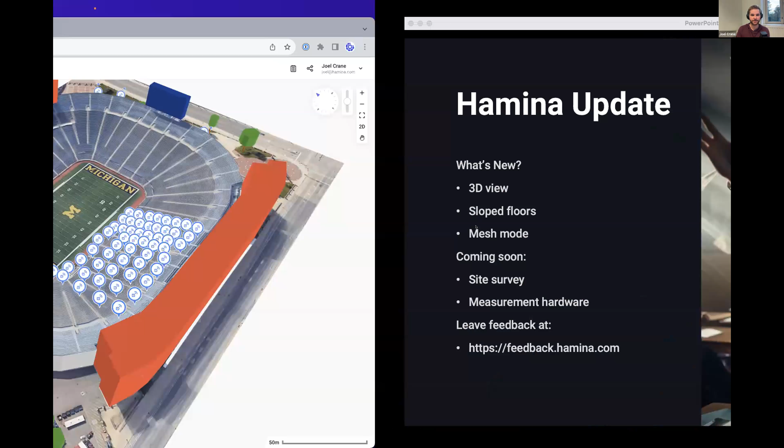Real quick on what's new in Hamina—we've implemented a 3D view. So you can look at everything in 3D, making that jump from 2D to 3D isn't as big of a deal as you'd think from a programmatic perspective. I should be careful not to say that around the developers—they'd say, what do you mean that's not a big deal, it was huge to build that in there. But when we have a floor plan and know the heights of the walls and APs, we have all the data we need to show how tall everything is. The big thing I like to use the 3D view for is validating that all my geometry is correct, making sure warehouse racks are the right heights and all that stuff.

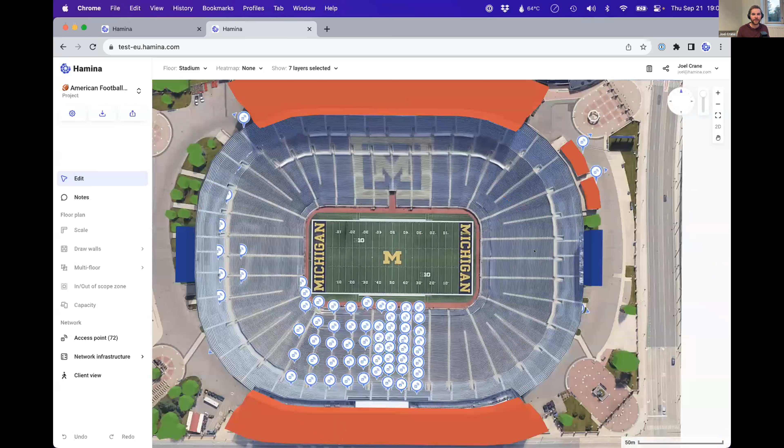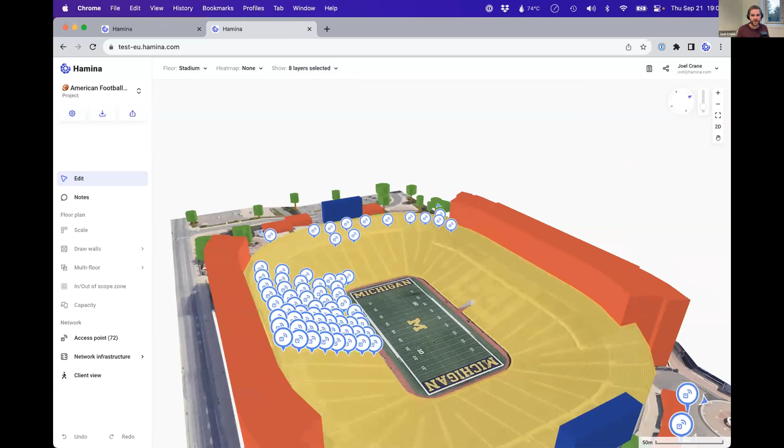In addition to the 3D view, we also implemented sloped and raised floors. The way I drew this particular map, it's a 2D image, just a snapshot from Google Maps. Then I went through and drew in raised floors—these orange areas are where the floor is raised—and also sloped floors. You define a lower edge and an upper edge, and we can draw a slope on that. You can even draw in crowds on top of that, and the final result is a full 3D model. Even more recently we did attenuating objects and walls with a lower height and upper height, which is how I get the Minecraft trees here. It all propagates in 3D properly—everything works like it should, pretty great.

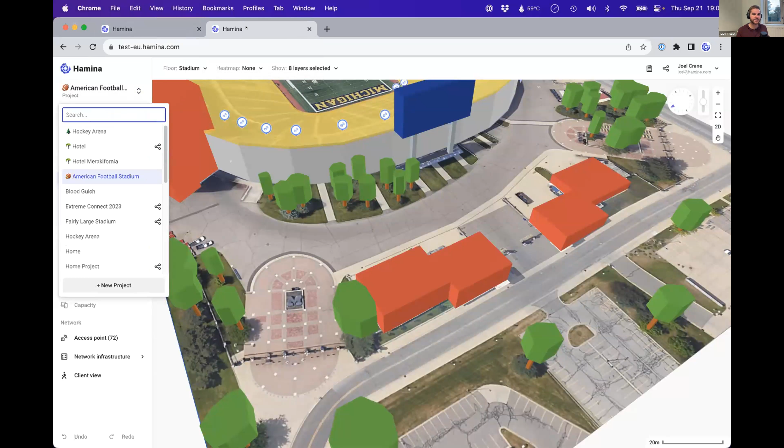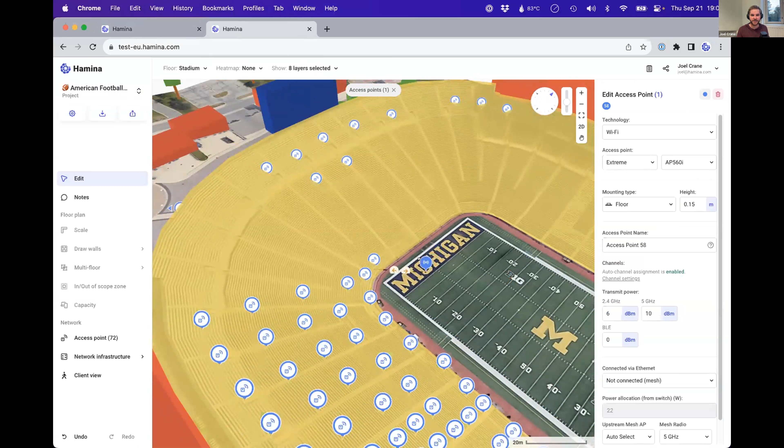Last thing I'll show really quickly before we move on—just for the sake of time, I'll tell you it's there. There's also the ability to do mesh links now. You can go pick an AP, we'll grab this one right here, and if you disconnect it from the Ethernet backhaul, it'll establish a mesh connection. I'm going to do a ridiculous scenario here, you would never, ever do this, but you can see I've got two APs—this one is our upstream AP and our downstream AP. We're looking at negative 76 dBm, and we're expecting 432 megabits per second on the PHY side of things.

So you can use that to look at what backhaul is going to look like and all that. So, okay, that's probably enough for a quick product update.

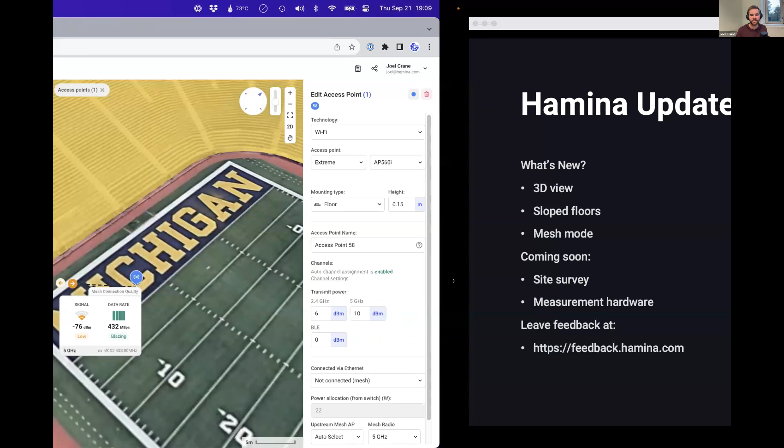And so with that, I think we'll turn it over to Mitch to talk about 1 AP per classroom. So Mitch, what do you got for us? Is 1 AP per classroom legit or is it not legit?

Let me start off by saying that this used to be an argument a lot, a handful of years ago. I can remember being on Twitter having discussions with people about it. I'll just assume it's probably more common these days just because of the amount of devices that are in classrooms.

Now with that, I have to say, with just a little bit of backstory, the school district that I work for is a little bit different.

Thanks, Joel, appreciate it. But yeah, like we have, so just a little bit of backstory. And if I get a little bit long-winded, please speed me up, Joel, please.

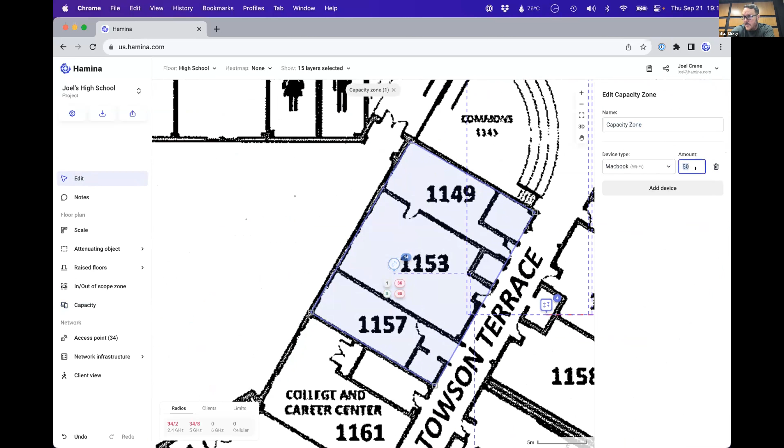We have a very loose guideline that people can see, as far as like this is the AP, this is what it looks like, this is its model number, and this is approximately what you can expect. I'll be honest, I hated slapping a number to that, because obviously it depends. But we do have something to establish a loose expectation, so people know whether maybe they're having a problem, or maybe they've just gone over capacity, and we've got things to remedy that quickly. For us, we loosely state a range of devices that can be expected in a classroom based on whatever access point is in there.

Question for the chat: if anybody has sort of a max client count, everybody's environment is different, everybody's use case is completely different, but it'd be really interesting to hear what kind of client count people try to stay under on their APs. Maybe throw in environment, use case, client count, because those things kind of go together in my mind. It'd be interesting to hear.

So Mitch, have you in Hamina—just to kind of bring it around to Hamina, right—but one thing we do in Hamina, you can actually put this in there, is define the capacity zone. Have you used this, Mitch? It's okay if you say no, it's fairly new. Yeah, that's okay, I can't say honestly that I have yet.

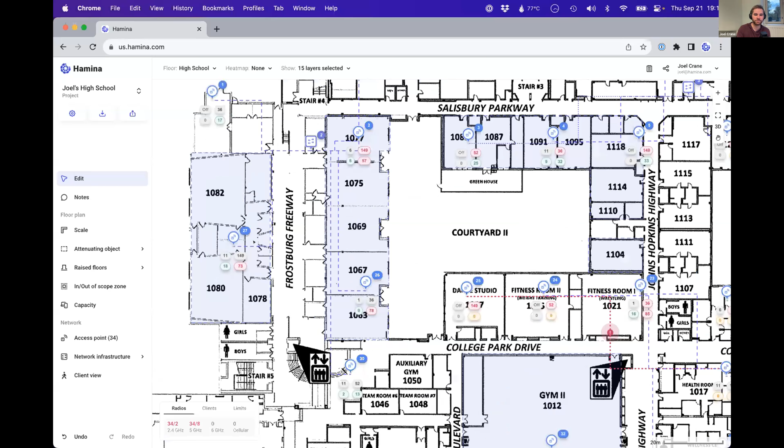Okay cool, so this is the design that I'm going to have you guys grade in a little while, so you get a sneak peek at it here. Basically what you can do in Hamina is draw in a capacity zone, and then say what devices are in there. So here I've got like 60 MacBooks and 50 iPhones. Then we use our roaming algorithm, the same one we use for the client view, to determine which APs we think all the clients are going to associate to. Now obviously we can't factor in how they moved into the room or anything like that, they're kind of teleported into place, but the idea is it's supposed to give you a good idea of how many clients you're going to end up with on a given radio.

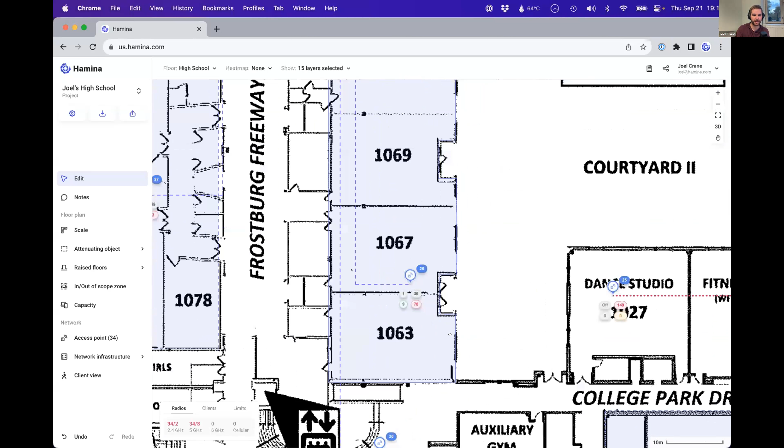Like here you can see this one, we've got 78 clients in the 5 gigahertz band, 9 down there in 2.4. So that's kind of why I'm interested to hear what people try to stick to. Clark Moore says try to keep it at 50 per classroom. Anders says under 35. Gary says 75 to 100, but it's totally based on capacity requirements.

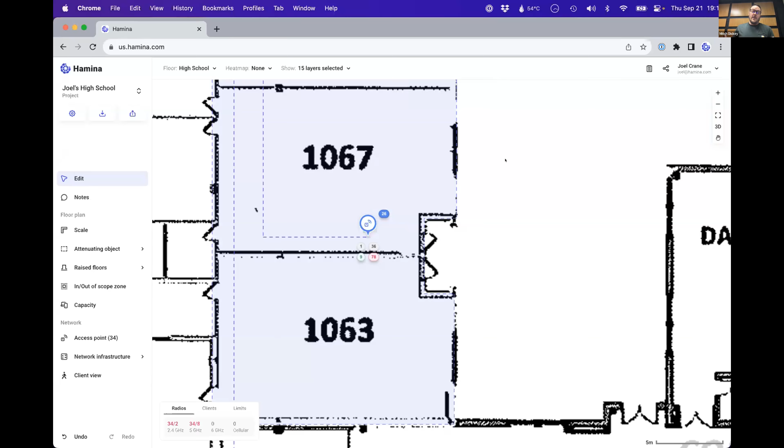Yeah, absolutely. So based on the most common access point that we're using right now, I would say 50 to 75. It's just a common access point on the market right now. 50 to 75 is where I like to try to keep it.

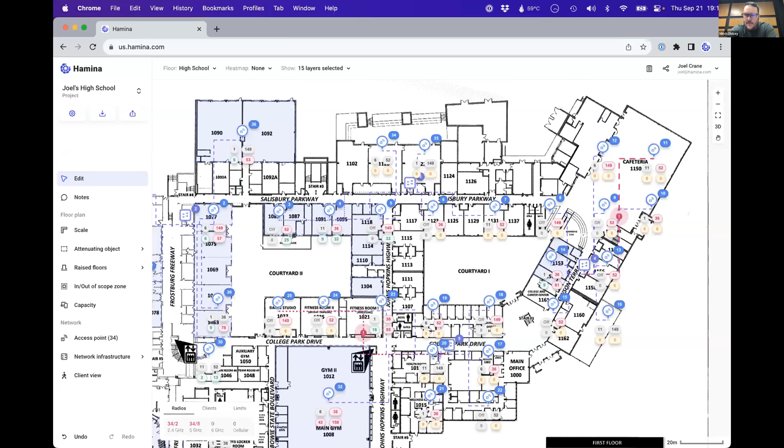So it sounds like it's very similar. And by the way, I just want to say, and I have not used this specific thing, but I know you and I have talked about it offline, this is really a game changer to be able to visualize this type of thing. Obviously can't be 100% perfect, but it's so good to see, especially when you need to explain something to leadership.

Nice, super glad to hear that. I'll be so bold as to put a number on it as well, and I'll prefix this with it depends on the use case of the classroom. It also depends on whether I'm doing dual band, tri-band, single band, 20 meg wide or 40 wide channels. So my standard design for a 20-person classroom, doing 5 gig only, 20 megahertz channels, I'll put about 20 devices per AP. If I'm doing 40 wide channels, I actually did the math, you can fit more clients on a 40 wide channel, so I'll go up to about 33 clients per AP for classroom designs.

And Bryan, just to be sure I'm understanding it clearly, it's because since you have the wider channel width, we can hit faster data rates, get devices on the air and off the air quicker, and thus cram more on the channel. Exactly. So that's why in my classrooms I'm doing 40 where I can, 20 everywhere else.

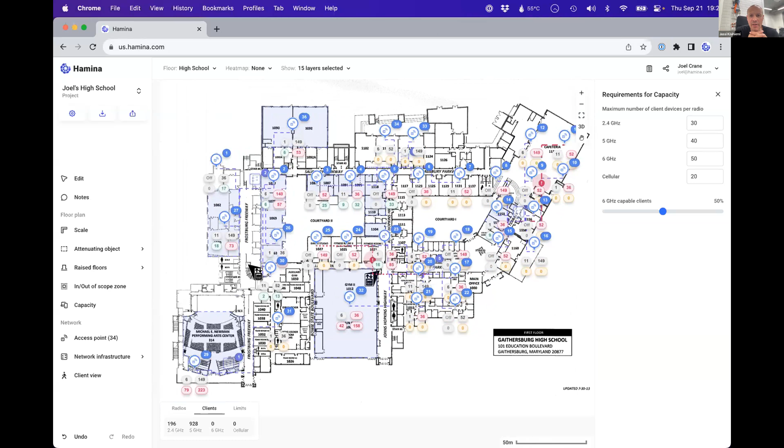Yeah, thank you, Joel Crane. Joel Albert Crane, as his full name is. Yeah, Bryan, I was going to ask, you said 40s where you can and 20s where you cannot. How do you design where you can and where you cannot?

So it's about density. How many 5 gigahertz channels are available in your region? Here in the US, there are 24 20-megahertz wide channels available if you include all the DFS and the 2C band. So if my capacity for a classroom means I need more than, call it 12 APs whose coverage would impact that classroom, then I can't do 40 wides, I have to do 20. Otherwise I get way too much CCI.

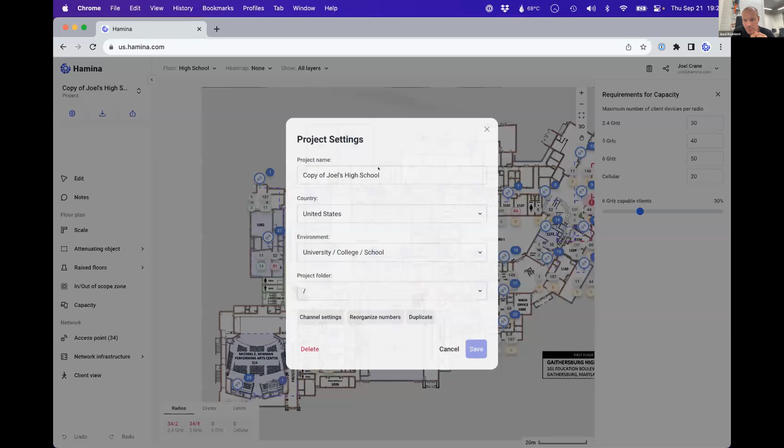So the reason I also ask, sorry Joel for hijacking a little airtime here, is our roadmap. Not to spill the beans, but I'm going to. We've been working on an automatic channel width adjuster, and the first version will be flat throughout the site, an ideal channel width, so if you start to see too much CCI, it drops the channel width, stuff like that. That will be released pretty soon, and I'm putting words in the mouth of our architects, but yeah, that's coming first.

But we also discussed today, like what if you're going to go all Bryan Ward on it and have all dynamic channel widths. That would be version 2, especially since it sounds like people are actually doing it. I should clarify that in the 40 where I can, 20 everywhere else model, that is a site-wide determination.

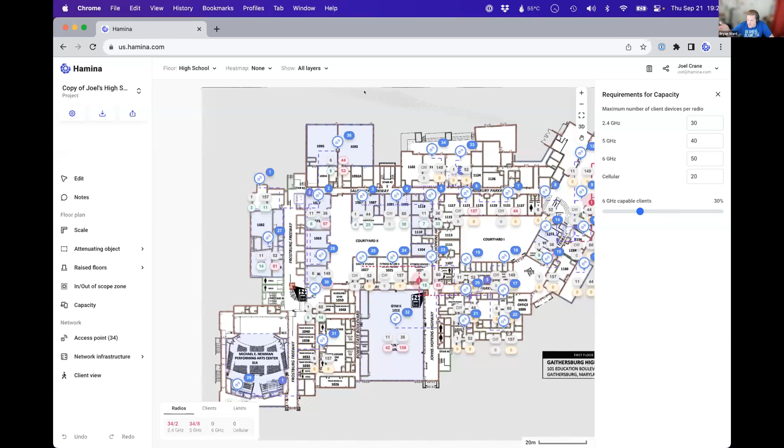Yeah, so it's an entire building, or at the very least, the picture. So there's some talk in the chat that clients are very sticky to their 40 and 80 wide APs, because they use data rate as a basis of association. You cannot mix them actually, or you will run into unpredictable roaming.

That's a very good point. I tried in some of my dorms 20 wide in the student dorm rooms and 40 wide in the lounge at the end of the hall, thinking, hey, if you're in the lounge with 50 people watching Netflix, you get a higher data rate. In reality, the students in the lounge who walked back to their dorm room would be sticky to that AP, even with a horrible RSSI.

Same thing with 4-stream APs and 2-stream APs combined in the same environment, obviously. That's been less of an issue for me, at least that I've seen, but the channel width is definitely high in the roaming algorithms of clients. And the 4 versus 2 stream, 4 streams aren't always available anyway, depends on the environment and how much spatial multiplexing you get. And now with all the Apple devices, they're only doing 2 stream in the client devices.

Nice. And if I could just piggyback a little bit off what I was saying before, I even owned up to it that I hadn't done a ton of research on 6 gigahertz yet, but I did read up on it recently. It seems just based on the physics of 6 gigahertz and AP per classroom, obviously the higher the frequency you go, the more it attenuates, or the quicker it attenuates.

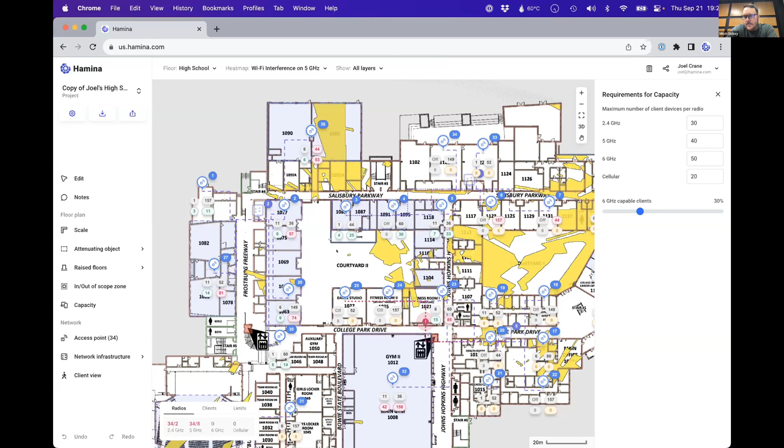Honestly, there really isn't a strategy other than, most classrooms are roughly the same shape, just your classic square cinder block type construction. We'd throw them in the middle. We try to get as close to the center as possible of every classroom, knowing that there's going to be one in every classroom. We try to put them in the center.

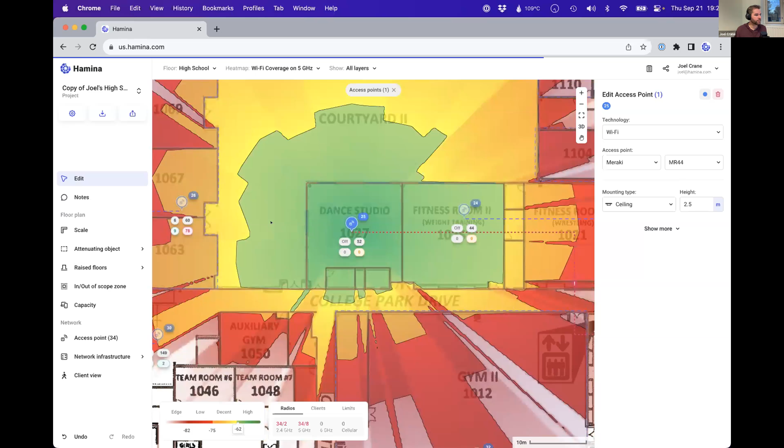Gotcha. Cool. All right. Well, with that, I think we can probably move on to our next topic, which is Bryan Ward.

Hey, Bryan. I don't think you had a chance to introduce yourself earlier. By the way, this is an actual photo of Bryan's last speaking engagement. He got a haircut and shaved since then. But as you can see, the room was packed, so people were really interested in what he had to say. But yeah, Bryan. Oh, go ahead, Jerry. I was just going to say, I'm a little disappointed he didn't dress up as nice for this webinar. I guess we see where his priorities are.

My red clown wig hasn't arrived in the mail yet. I have nightmares about this photo. Thanks, guys, for making this. You're very welcome, and we didn't make it. That was taken, that's a real photo. It was a real photo. Okay.

I joined late, I was having trouble getting on the Zoom. Anyway, I'm Bryan Ward, I work at Dartmouth College here in New Hampshire, United States. Among many other jobs, I'm the Wi-Fi guy. So I was invited to speak here, and what I wanted to talk about was less about Wi-Fi and more about how to even get your design started.

I saw some stuff in the chat when I joined, like, hey, we don't even get floor plans. Well, that's a problem you need to solve. Every project, be it new construction or renovation, there's a set of architectural drawings that has to be stamped and approved by your local town building inspector. That is a hard requirement. So someone somewhere has the CAD files and the drawings, and you just need to find out who that person is, or who to ask to then go and ask the architect for them.

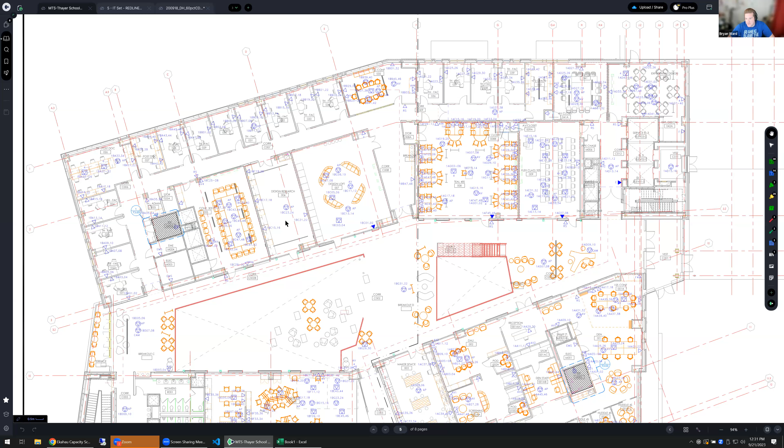Some other types of drawings aren't even drawings. In the CAD file set that has to get approved by the inspector, you can usually get occupancy counts. So in the classroom, we've got 849 square feet of classroom, seats 43 people. Valuable information when you're designing Wi-Fi. They break it up by floor, and they're not doing this to make your life easier, they're doing this because of fire code. They're required to provide to the fire marshal or local inspector how many people are in the building and how quickly they can get out in an emergency. This information exists for other reasons, you just need to ask for it.

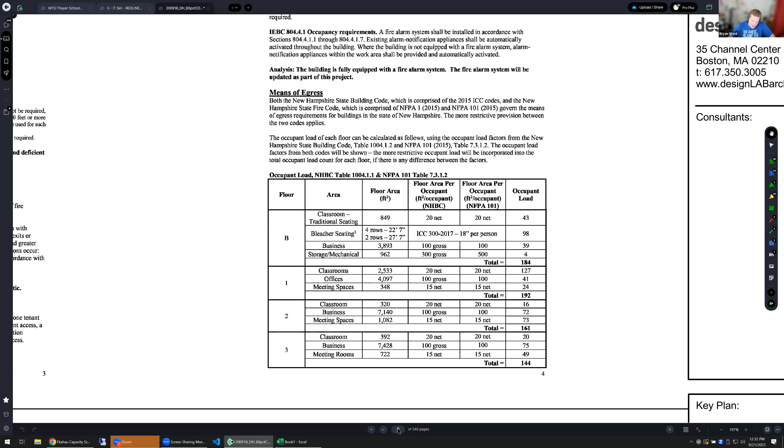Going to another page, another example of a reflected ceiling plan. Again, you can see not only the floor plan and architectural layout, but the drop ceiling, or in cases where you've got a fancy ceiling finish like here, you can see what areas are there. I've done a number of buildings where I show up to hang an AP expecting a drop ceiling, and no, it's this fancy woodwork I'm not allowed to touch. Knowing that in advance means you can adjust your design before you show up.

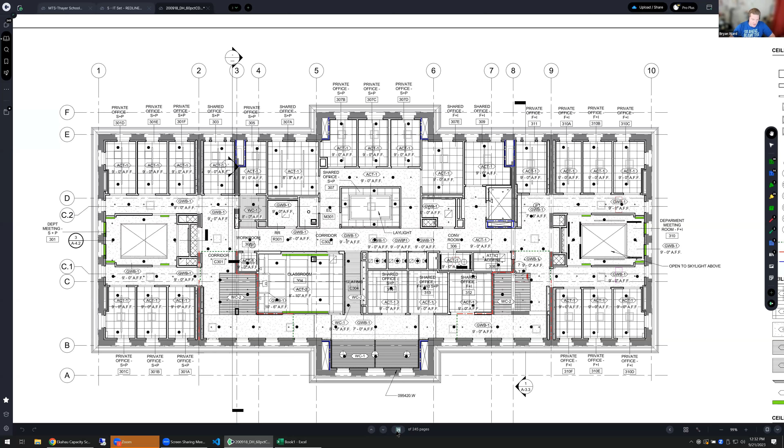If I go to this page, the architects also have to define how the walls are constructed. A huge part of designing Wi-Fi is knowing what your wall materials are. While you can go out and survey an existing building with your survey tools, if this is new construction you don't have that ability. Work with the architect, they have details of what the walls will be made out of. So here we've got 2 layers of 5/8 drywall, 6 inches of insulation, staggered metal framing, and then more insulation and drywall.

There will be floor plans that show, all right, this wall is type 1, this is type 2, and you just cross-reference the other sheets in the drawing package, and you could come up with a very precise wall pattern for attenuation in the Hamina tool.

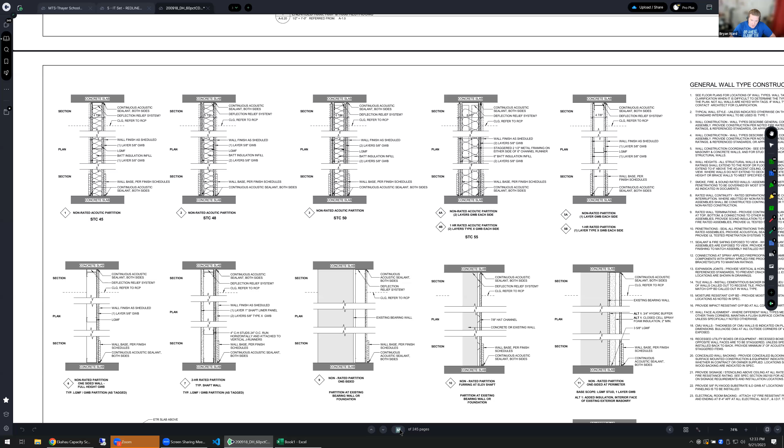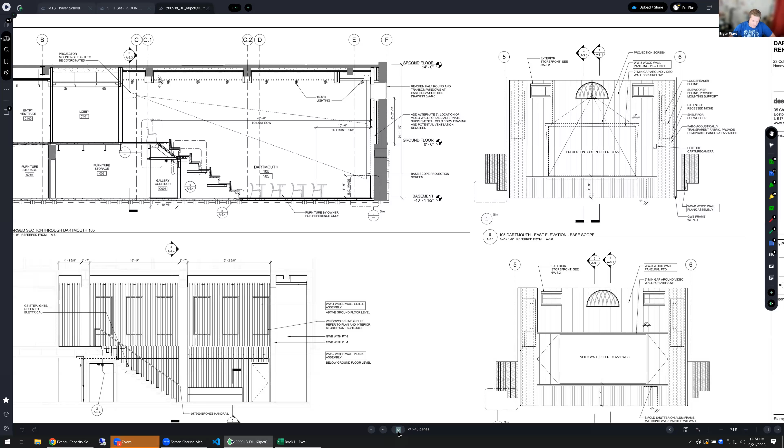One of my favorite problems is HVAC ductwork. Like the drop ceiling guys, the HVAC installers don't just show up and mount sheet metal, although that sometimes feels like it. Architects draw this as well, so you can see, oh look, there's going to be ductwork here - I'm not going to put an access point there.

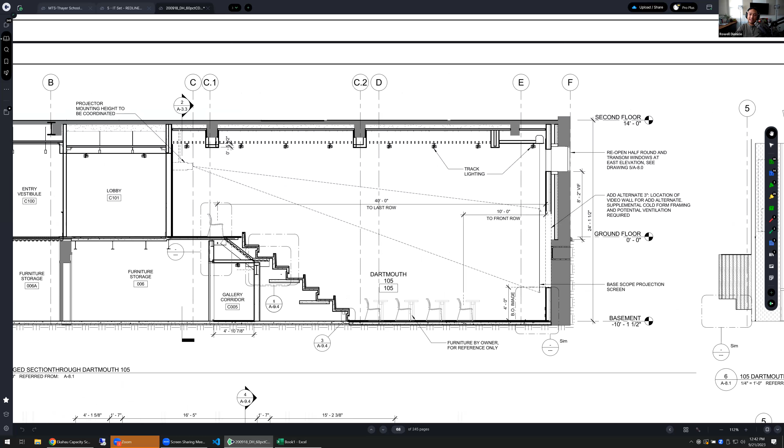Yeah, I'm showing drawings here from construction in progress. You probably won't have these for an existing building. You can ask, they might exist, but probably not. They exist, but somebody doesn't know where to get it. They don't know who to ask, and then they'll just say, 'Can you just use what you have?' And it's definitely not been kept up to date.

I think worst case, go into the hallway near the elevator and find the fire emergency map, here's how to get out of the building, and take a picture of that with your phone and scale it up to the correct size. At least that's going to be representative of what the building is.

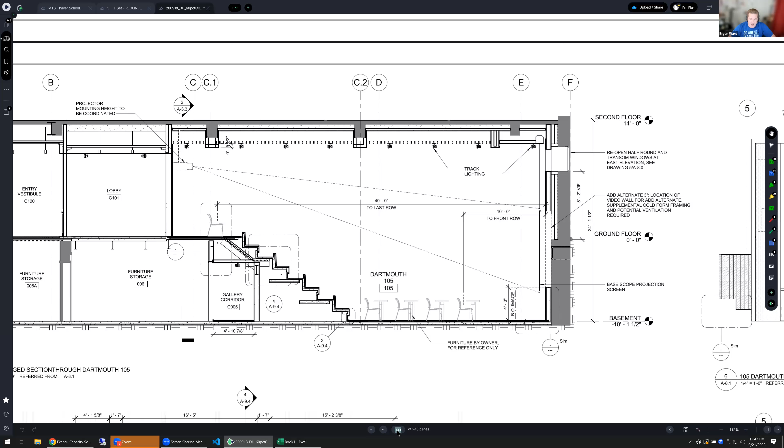One other point I wanted to make was there's a lot of interesting things you can find in floor plans. For this building, just looking through, it's like, oh, I'm looking for floor plans and section views, and oh, surprise, there's a wirelessly controlled lighting system. If I'm designing Wi-Fi, I'd love to know about these things before they get installed.

We can all raise our hand. How many times have we seen a motion sensor destroy the upper 5 gigahertz band? If you can find out in advance that they're putting one of those in, I can adjust my channel plan, or better yet, go back to them and say, listen, this product you picked is going to cause chaos with the Wi-Fi, can you pick a different product? A lot of times they can say, yeah, we'll pick something else.

So once you start making these interpersonal relations with your architects, the campus planners, the contractors, they're going to start listening to you as well. I was very fortunate on a recent project - the project manager told me, 'we will change the architecture to match your Wi-Fi design.' I was blown away. So keep working the angle and express that Wi-Fi is important, you've got to plan it.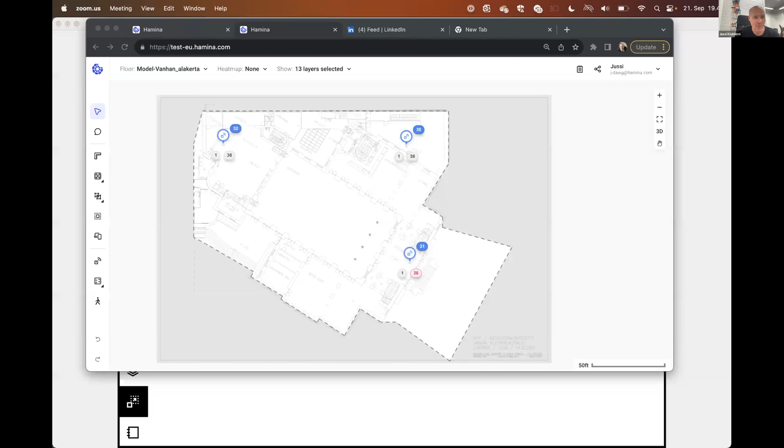Absolutely, thank you Joel. I'll be quick. So of course, like a good Wi-Fi design, it always starts with requirements, right? I hope you can see my screen. I just list out my requirements. Requirement number 1 is green, and requirement number 2 is cheap. So the map needs to be green, that's my requirement number one, and secondly, the budget for this old student house of a couple of floors cannot exceed $300, which sounds pretty realistic and generous to me.

So let's take a look at how I actually accomplished this goal. Hold on, where was I? Is that the school of hard rocks there? Not exactly, that's the school of rock, indeed. Yeah, that's Jack Black actually back there with his Wi-Fi IP. Here we go, so this is more like it, different browser window.

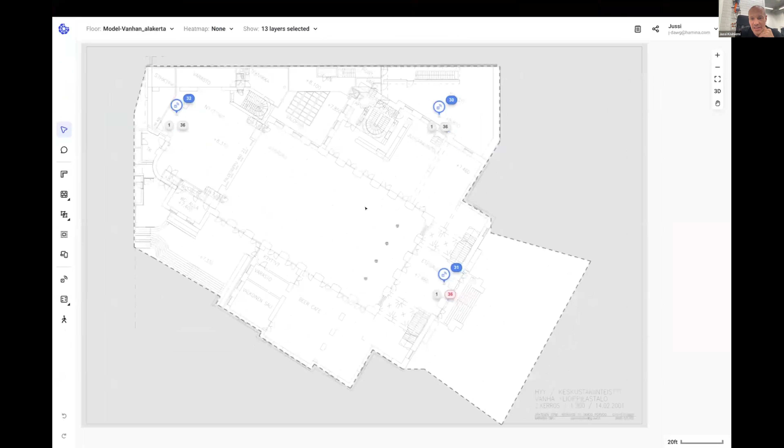So what I actually did is I accomplished this by placing 3 home routers here. And if we look at my Wi-Fi coverage, as you can see, this looks great. I've done a channel plan as well - you can see 2.4 channels, 5 GHz channels below the APs. The map seems pretty green to me. And look at this, this is actually secondary coverage even, primary coverage looks great as well. So task accomplished, mic drop, and I should actually drop the laptop because the mic is integrated. But anyway, what do you guys think?

Where's my CWNE? That looks good. Everything's on the same channel. A+, see you later, everything's green so it's good. Yeah, exactly, and I even made a fancy 3D version out of it, so very professional too.

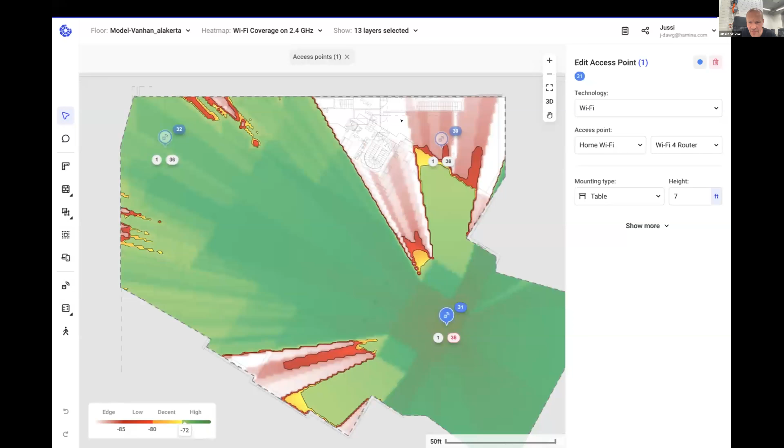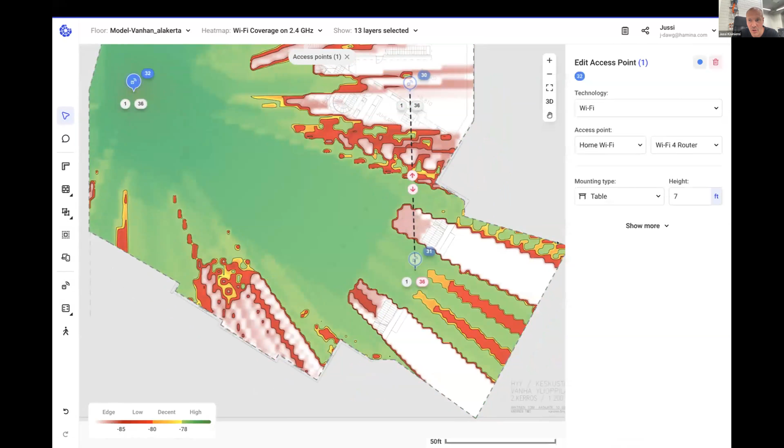This is in honor of Mitch's previous life - this is a single channel architecture using a home Wi-Fi 4 router. And if we can't do cabling, you know what I'll actually do? I'll just put a mesh link here as well to add reliability a little bit. Yeah, because you don't want to have to install cables to these, you just want it to work, who would install cables? Yeah, and the mesh link seems solid. So futuristic, I like it. I give it an F. You see an F, wow.

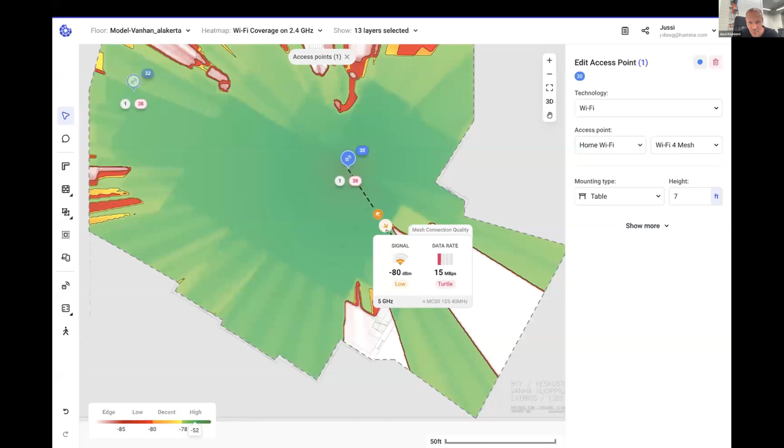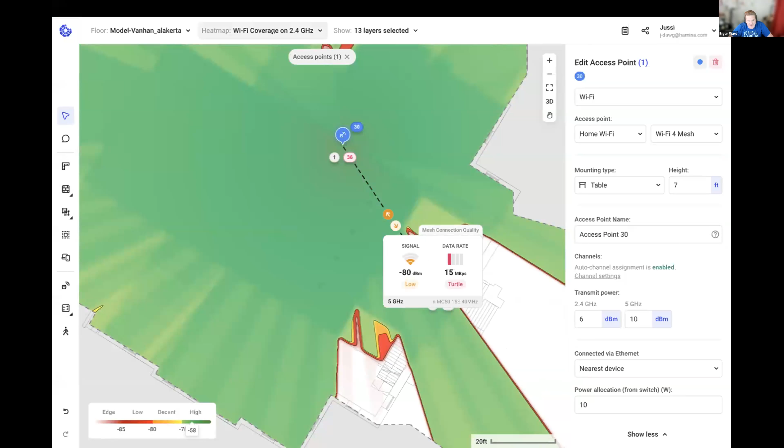F as in Pharaoh grade, because Pharaoh was like the emperor of Egypt, right? The mesh link seems, just in case someone's listening and they decide to hop out at this moment and go, hey, Jussi said this design's pretty solid. So did all the people on the panel. Hey dude, this is data rates. I did have 40 megahertz channels on 5G, but doesn't that give me some points? No, the last 2 minutes have been entire sarcasm. This is horrible, you should never do this.

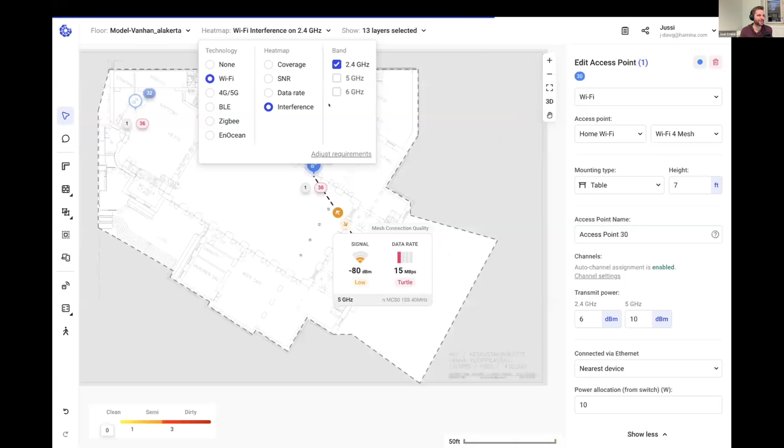It's all on the same channel. And what's the problem with having it all on the same channel? Co-channel contention definitely would be a problem here. It's not just the co-channel with the 3 APs, it's all of the clients associated to them. They're all speaking on the same channel at the same time. So when you're designing for capacity of a classroom, the channel plan is more about the number of clients than it is the number of APs.

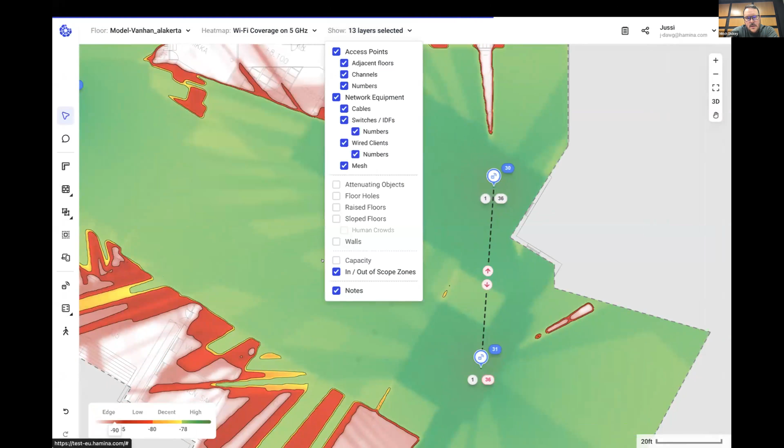Absolutely. So, forgive me if I missed that, but was there a clear requirement that was established for your design, UC? Yeah, there was green. It was green and green and cheap. Yes, okay, yeah, that was the requirement. I think everybody would agree that the foundation of a good wireless plan is always going to be making sure you have the clear requirements for it. So obviously green and cheap, as much as we all would love those, are not good requirements, to be honest. They're not realistic. Yeah, it's not realistic. And usually if somebody provides those requirements, I will have to say garbage in, garbage out. That's what's gonna happen. Bingo. Yeah.

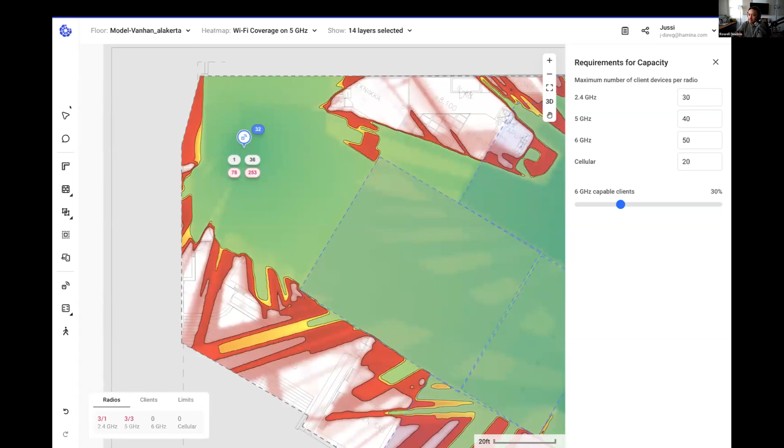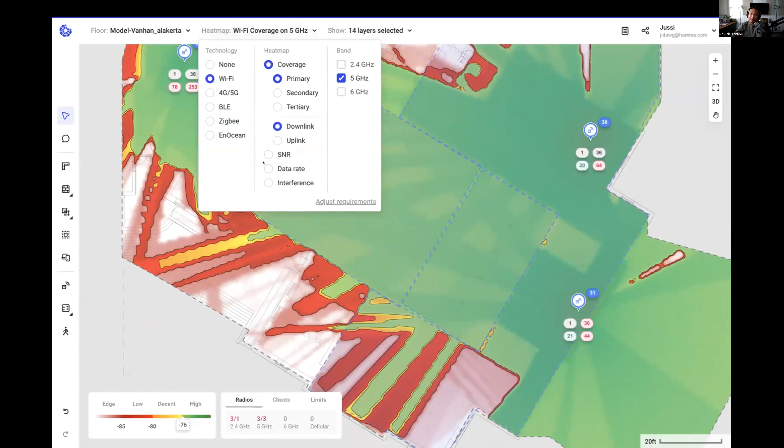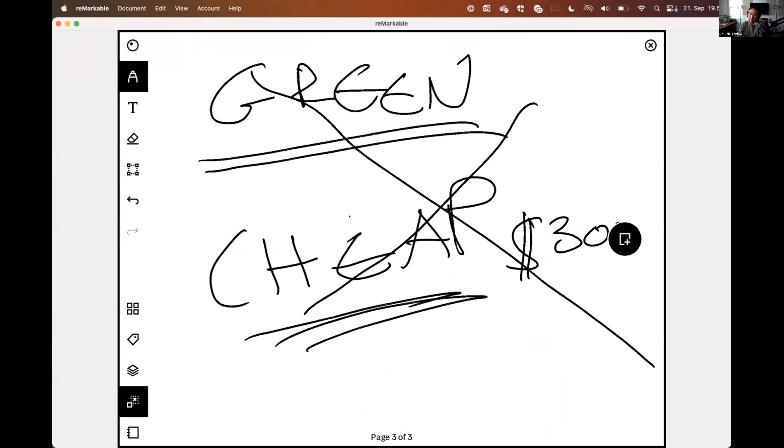Yeah, we can see a little bit of overcapacity in the APs as well, because there is an event space here and all that. So we're getting like 300 clients on a Wi-Fi 4 AP radio. So definitely capacity is not quite there. But if you were to get requirements of cheap and green, that doesn't necessarily answer the requirement for what needs to happen in these rooms. So if cheap and green means nobody can do anything, you can't do your tests over a Wi-Fi network, or you can't tell these students to go to a simple Google Workspace page, then you have not met the requirement. So as a Wi-Fi engineer, you need to actually ask more questions and say, well, what do you want Wi-Fi to do for these people in these rooms? How many devices are we talking about? What applications are they going to use? And that's what you're going to feed your design into, so that way you can tell them, hey, to actually meet your actual requirements, I cannot do it cheap. It's just not going to work.

Yeah, find out what applications are in use in your environment. You might have to go and ask the faculty, ask the learning design team if your school has that. If they're saying, yeah, we need everybody to be on Zoom simultaneously, as ridiculous as that sounds, that's a reality. I've seen auditoriums where every single student is on the same Zoom call. And find out what the requirements for the application are. Zoom's requirements are very well documented. If you're doing live proctored testing, like a Pearson exam, find out what their requirements are.

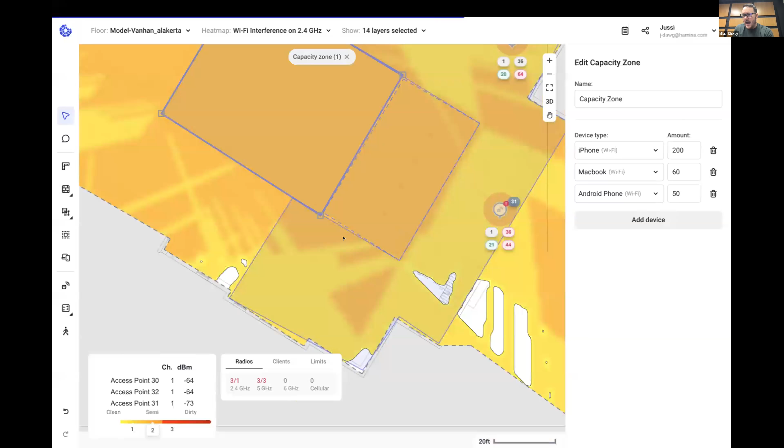Exactly. Use all the tools at your disposal, because sometimes even if you go and tell them cheap and green isn't going to work, they're going to be like, come on, we all know, we've been down that road where they expect one thing and you're like, it's not going to work that way based on this, and then you have to prove it. So use all the tools that are at your disposal, especially like this product right here. You can look right here, the amount of clients that are on this access point right now is not sustainable. This is not going to work. And showing them will oftentimes get you better expectations.

Absolutely. And actually, I'm demoing here also one of the upcoming features, which is the more detailed CCI view, where you can actually see which APs are interfering where and stuff like that.

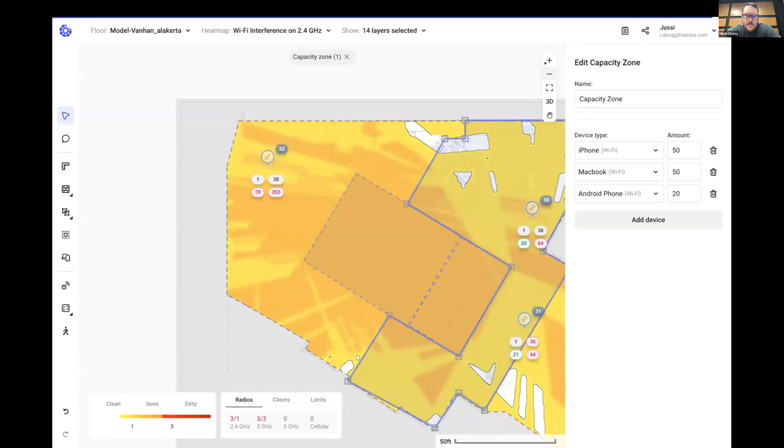That's very cool, still work in progress. Should we move to grading somebody else's work? I don't think we have time. It's 10, only 7 minutes still, so I don't think there's time by the time we get through questions.

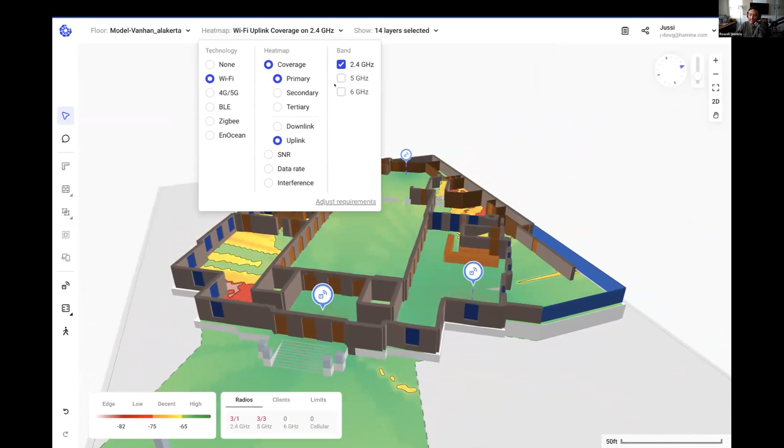Can I add a comment about your design there, Jussi? I used Hamina to help change an architect's mind about why I was brought in last minute on a project, not knowing a room was being renovated. My initial design had APs mounted on the ceiling, but they had a special ceiling they didn't want anything mounted on. So they asked if we could mount the APs on the wall instead, and instead of 6 APs, just do 2.

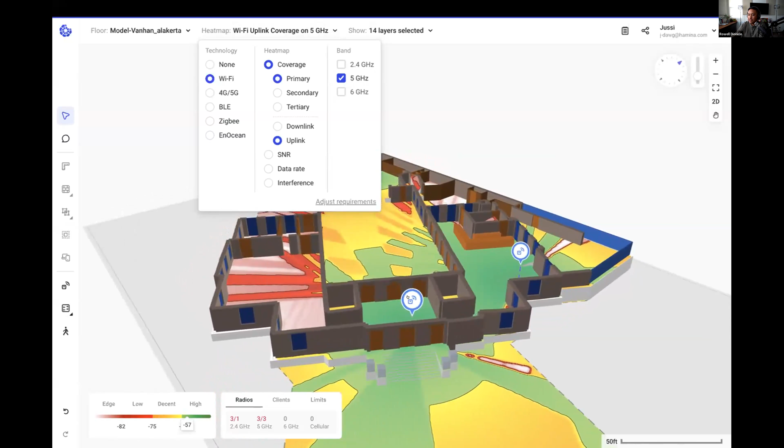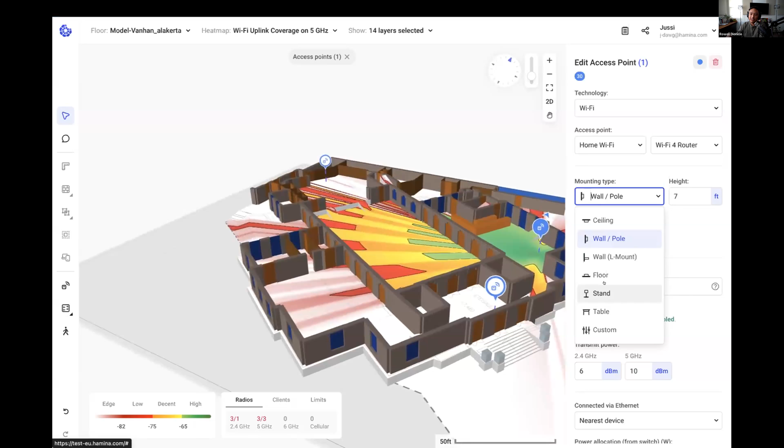So I used Hamina, put the 2 APs on the wall, and then used the client view to show why it wouldn't work—what happens when a student walks to the other side of the room and how that one AP doesn't provide the correct coverage pattern, since I was going for directional antennas in the classroom. I was able to change their mind with the client view and have them put the antenna on their nice ceiling instead.

Nice. I'm sure they hate me for that, but they have to figure it out—do you want to meet your requirement of providing Wi-Fi, or do you want it to look pretty? Sometimes you have to weigh that. You used your tool to show exactly what was going to happen, using all the tools at your disposal, because ultimately if it doesn't work, they're going to come to you.

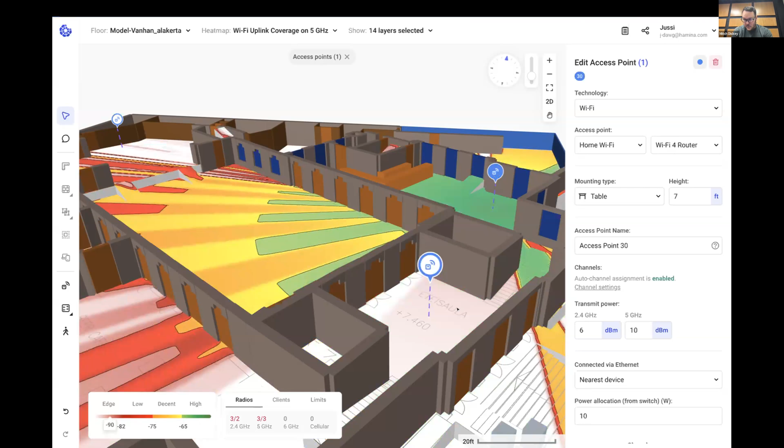And keep in mind, the architect isn't the one who makes the final decision—that's usually the project manager, representing your organization. I like to remind them that when construction's done, the architect gets to go home, but we have to stay and support this network. Very true.

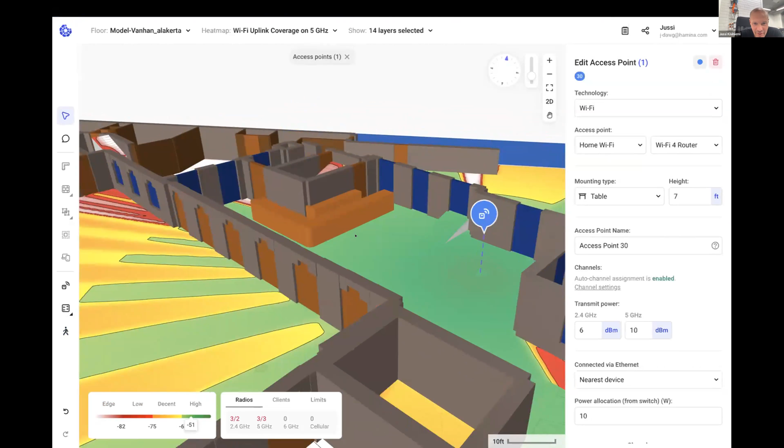And professional as I am, I did have the APs—like Rowell's ceiling wall mount—I had them on table mount, like where every good home AP should be. But Joel, maybe you actually had some substance for this webinar too, not just my design, which was pretty terrible. I don't know that we're going to have time.

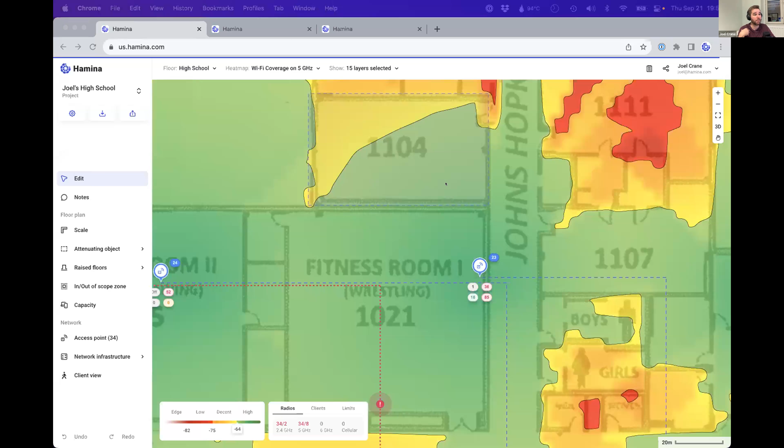Unfortunately we won't have time for the professors to grade my design or Jerry's design, which is a tragedy. So you're getting a get out of jail free card, huh? I can't help that it took that long to go over yours, and mine won't have to be graded—not my problem or fault. But I did put a link to it in the chat, so if anybody wants to check out my design, they can go do that and give me a grade.

Oh, we lost Bryan's audio. Sorry, I hit mute. It depends—what is this AP doing? I've designed Wi-Fi for entertainment venues like this where I'm not providing Wi-Fi for the audience. This one AP, if it's there to support the audio guy, then one AP is fine—you don't need to get the whole audience on this. Yeah, requirement met. All right.

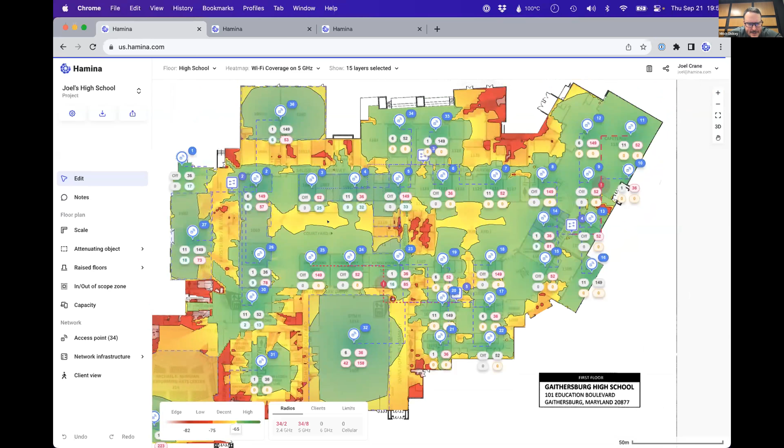So in the interest of being speedy, Mitch, what's the number one problem with this design? I'm so—for some reason it's looking a little grainy on my laptop, forgive me if it looks like I'm getting ready to step inside my camera here. You can double click, Mitch, to maximize it on your screen. It still looks a little bit grainy.

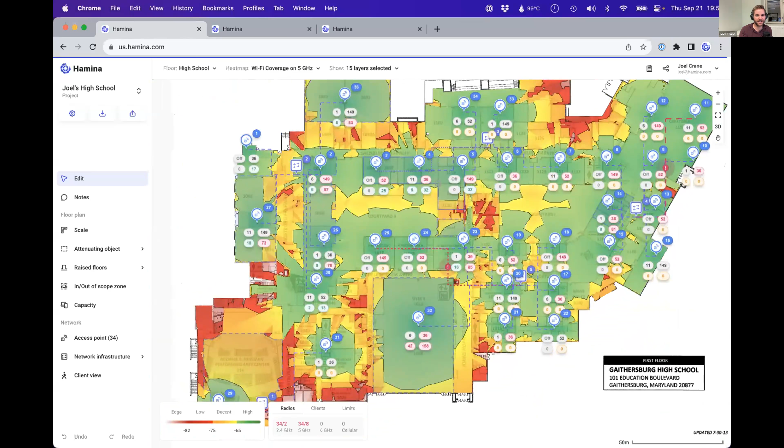By the way, the architect told me where to put the APs here—they drew X's on the map and I just put them there. That's a common struggle for me, it happens a lot and we have to go back, but we don't have time to get into that. I'm sorry, I just messed up—you might want to move on, it's not looking good on my screen right now. I'm sorry. Rowell, anything that you would notice here?

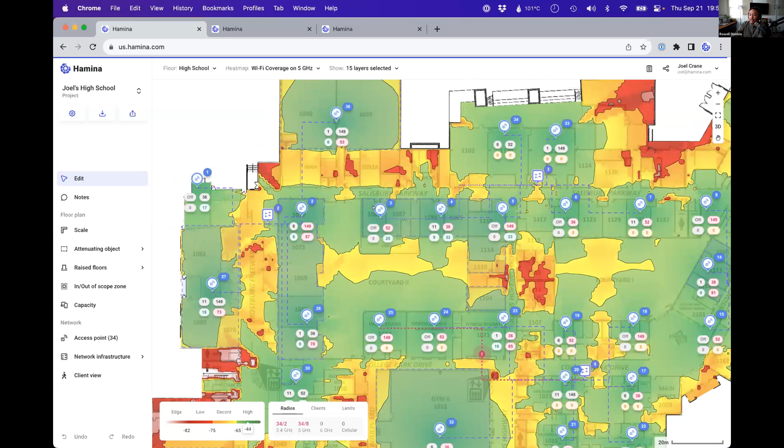You do have like, I always go back to that high density area. It's just not enough APs. I will say I've had to put a lot of clients on one AP. I've had it work with like 300 clients at one point on one AP.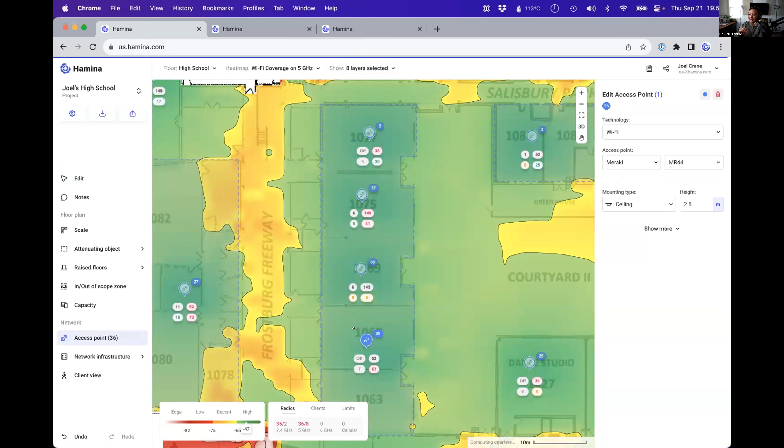And it usually comes down to the professor telling the students to not use Instagram, Facebook, YouTube, anything that's not class related. And then all of a sudden the Wi-Fi works because it is hard to design.

It is hard to plan or design, say like you've got a 300 capacity room and you're saying, okay, the most critical applications are like this website or this audio thing, but you have to accommodate people who are not actually paying attention in class and are just goofing off.

I've sat in a class and I've counted people who are just watching YouTube, watching last night's football game. And you just have to take that into consideration, because I've done it before where I just design for what is required, and it just fails because I now have an issue with other applications that are eating up airtime.

And I'll add on to that too, I agree, because I've had to. It's almost one of those things: meet requirements, but then also trust your gut and how you know it's going to be used as an engineer.

I definitely use that. So in these 5 classrooms, I budgeted 150. So I added some APs here to bring the client count down a little bit. I budgeted 30 laptops per classroom.

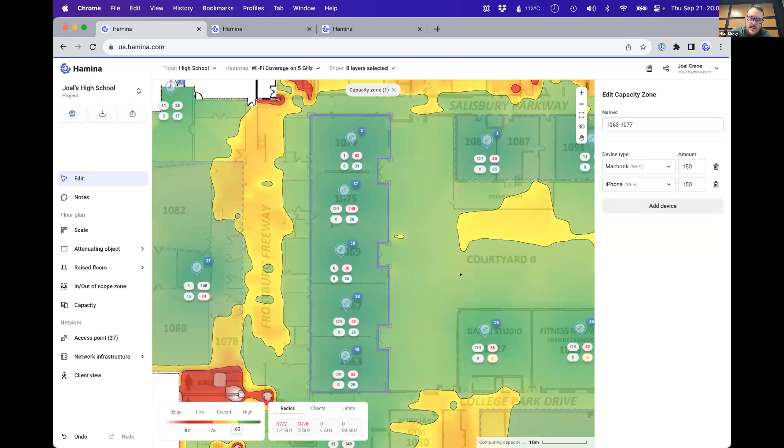Are you saying we should add like some phones or something like that in there? Like are people going to be using their phones on it? Yeah, so if we add like 150 phones, now we're looking at we're pushing 60 on this AP, 50 on this AP, really actually basically like 50, almost 50 per AP. That's obviously how the math works out.

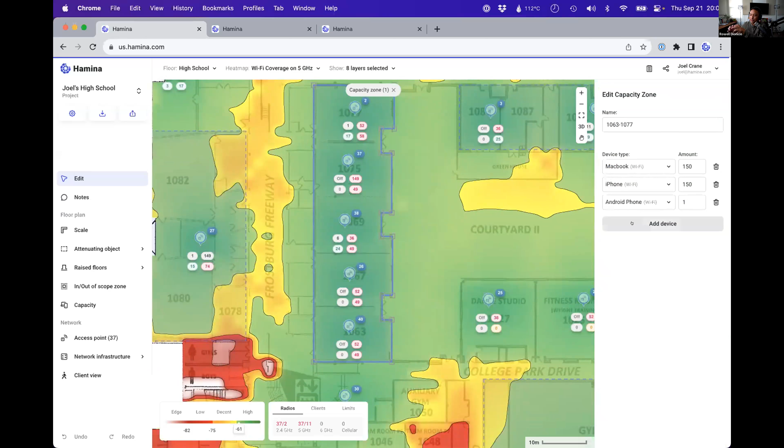But don't forget the iPads that are on the outside of the room that say when the next meeting is. Don't forget the thermostats that are on Wi-Fi. Don't forget everything else that's on Wi-Fi. Yeah, and people roaming down the hallways near that classroom, all those things.

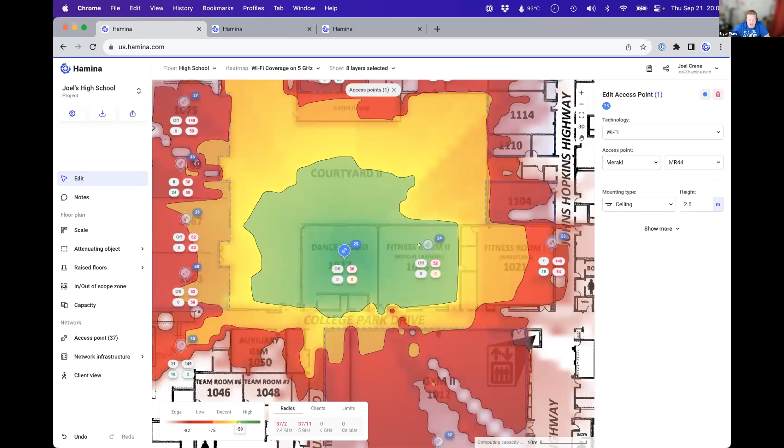Yeah, and plan for future growth. When you're putting AP locations in a building, those locations have to last for 10 to 15 years. So that means you have to predict, okay, well what is my use going to be 5 years from now? Say, all right, well I'm modeling 50 MacBooks right now, maybe I should model 75, just to say the bandwidth requirements will be higher in the future.

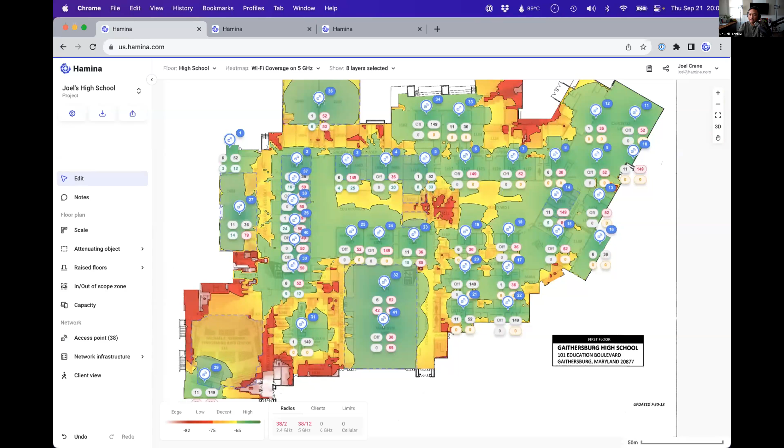Mm-hmm, yep. And I will say, when you're planning for growth, sometimes there is a physics limitation to how many access points you're going to be able to put into a room, if they're going to fit. If they decide at one point that high density area of 300 people is eventually going to condense the seats and double that, but you can only physically place, I don't know, 8 access points, you're just not going to be able to get everyone on the specified access point you think it's going to cover. There will be a physics limitation at some point.

And then that's when you have to have a larger discussion. And I'm about to have one with a client where I'm going to tell them, hey, can we just tell people to not use Instagram? Because I did the metrics and saw they weren't supposed to be using it, but out of like 1,000 clients, around 200 were using Instagram, and it was just the most used application of all the traffic in that room. And I was told that they weren't supposed to. And that's why I designed it to what they were supposed to be using, only to find out they're not using it.

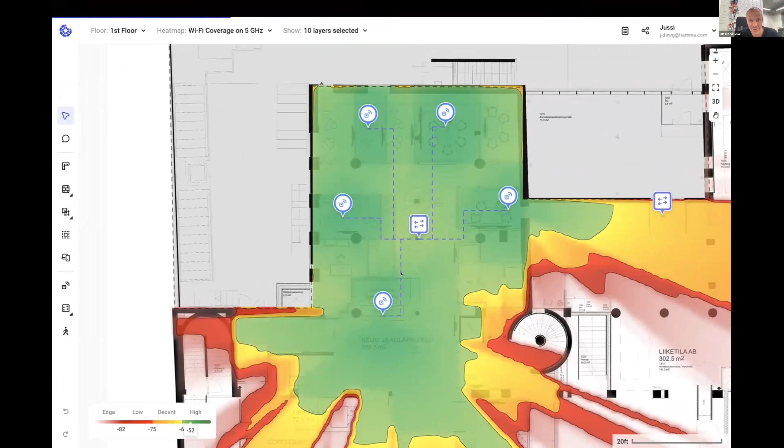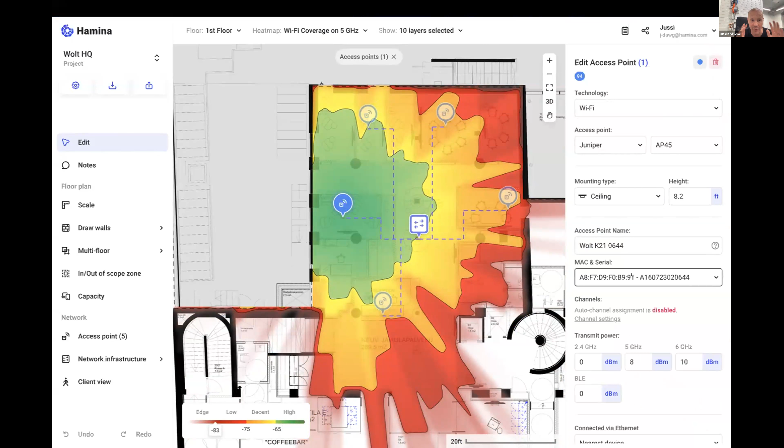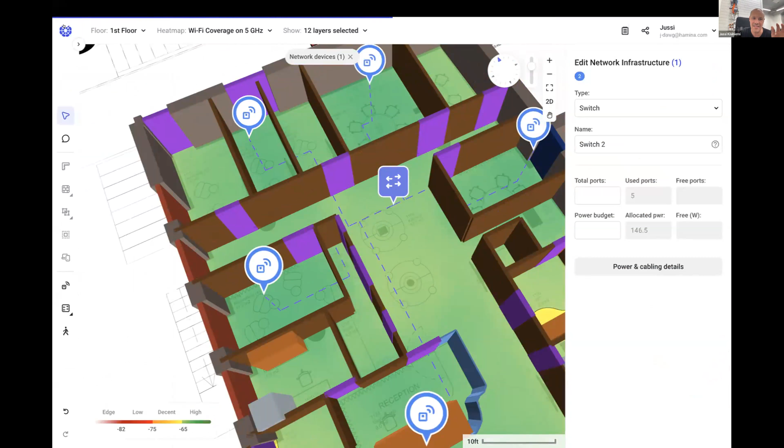Can it though? Yes, it can, and pretty easily too. Let me show you, I just pulled in one of our customers' networks here. This happens with a click of a button, you say import. This was a Juniper Mist network, works for Meraki, Aruba, and many others too. I just hit import, and it brings in the existing running network, the current AP locations, the actual APs, their running configuration, channel numbers, channel widths, transmit powers, everything. Here we can see the actual MAC addresses, serial numbers. This is the situation live on this site, not how it was planned, this is how the network is running live. All the bells and whistles of Hamina, like the accurate RF analysis, 3D, roaming, all of that can be used. So it's not just a design tool, it's also an RF analysis tool. We don't advertise this a lot, but I think next year people will realize it's not just a planning tool, it actually provides quite a kick-ass map view to analyze. I can see immediately my coverage on 2.4, 5, secondary CCI right here, right now on this site.